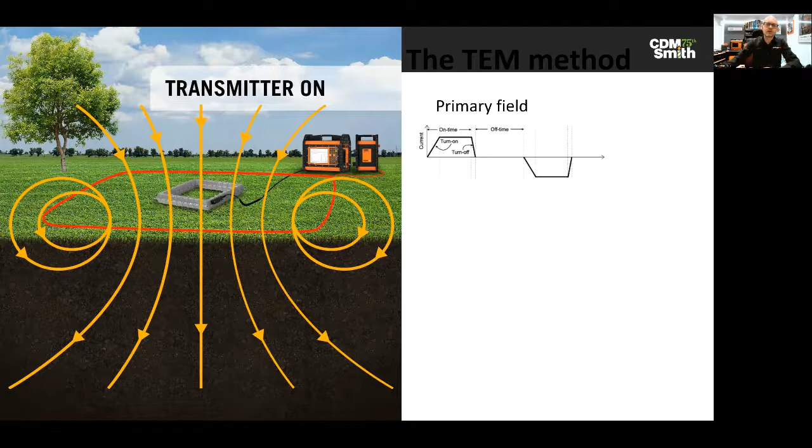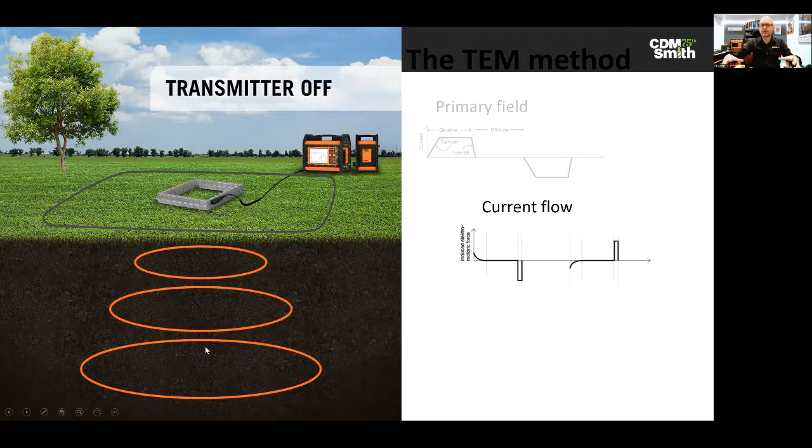What we then do is we switch that current off very, very quickly, and it forces that magnetic field to collapse. And because we can't just remove energy from a system, it has to go somewhere. So that collapsing magnetic field generates electrical currents in the ground, and we call these eddy currents, and they flow directly beneath the transmitter loop and then spread out into the ground, getting deeper and wider as they go. So quite often these are called smoke rings because of the way that they are propagated out through the ground.

Those eddy currents in the ground are acting like a current flowing in a loop of wire, and so they are generating their own magnetic field, and our receiver coil back at the surface is then measuring that field, measuring the eddy currents via their field, and we call that the secondary field. So the primary field is coming from the transmitter loop, the secondary field is coming from these eddy currents in the ground, and the way that those eddy currents decay over time tells us something about the resistivity or conductivity as we get deeper.

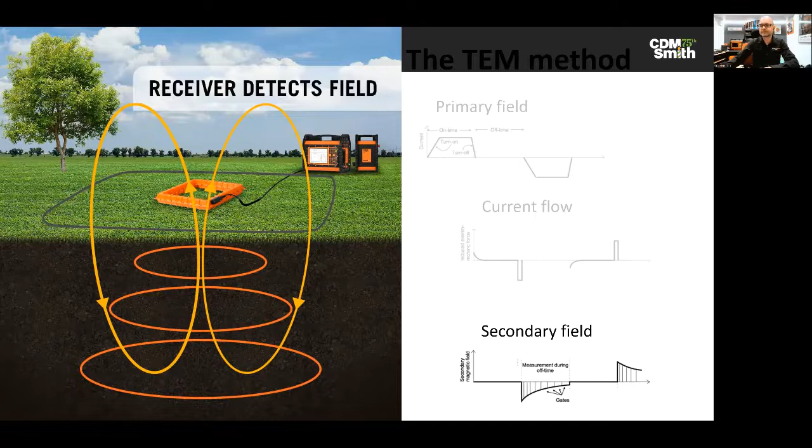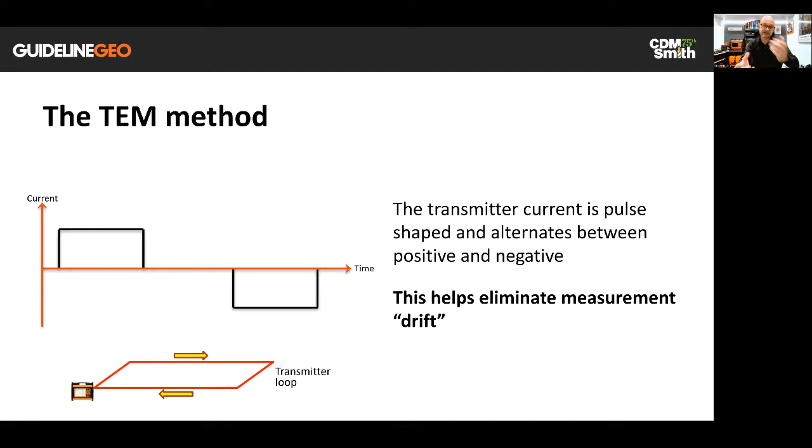It's not quite as simple as just firing a current around the loop and then being done with it. We actually pulse the current very quickly around the loop, and we pulse it in an alternating pattern. So the current is pulsed forwards and then backwards, forwards and then backwards. And by doing that, we help to eliminate any drift in the measurement. We are not charging the ground up in one particular polarity or another. We are hopefully, by the time we finish our measurement, leaving the ground in a very similar state to how it was when we started.

Unfortunately, it's not quite as simple as that initial drawing made out, with a nice square-shaped pulse of current switching instantaneously on and instantaneously off. We actually have a ramp of current building up in the loop, and then a ramp as the current is removed from the loop. And this is quite an important concept, because the faster we can remove the current from the loop, the bigger pulse we can generate, and also the quicker we can start measuring our response from the ground. And I'll come back to that in a moment.

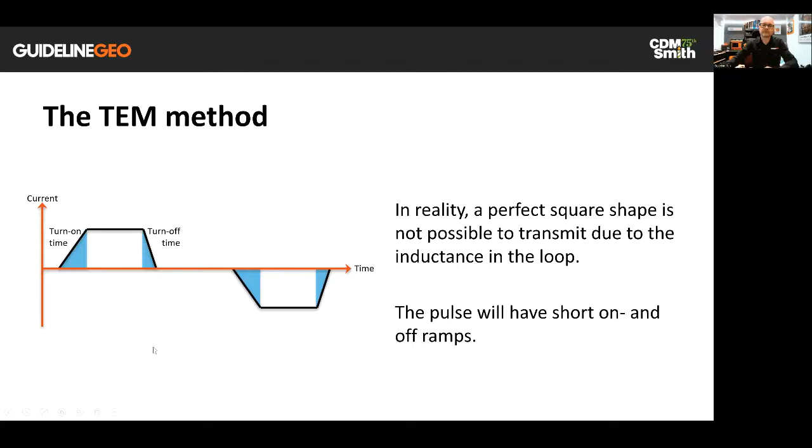But basically, whilst the current is being switched off, that's when we generate the eddy currents. That's when the magnetic field is collapsing and these eddy currents are starting. And we call that an EMF, electromotive force. And it's a pulse of energy generated by that current switching off.

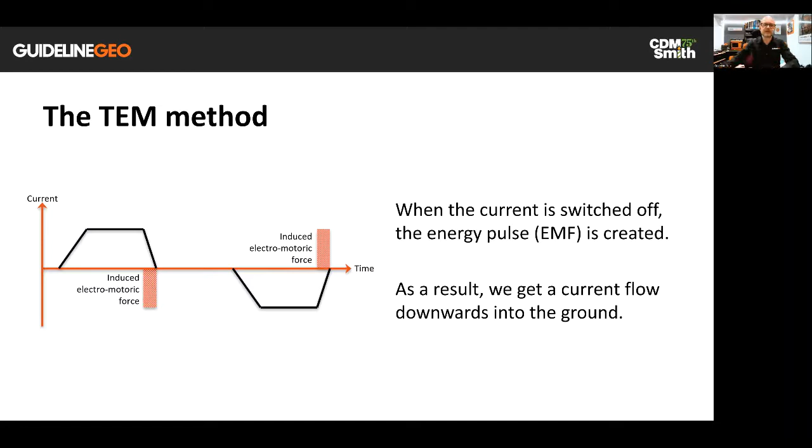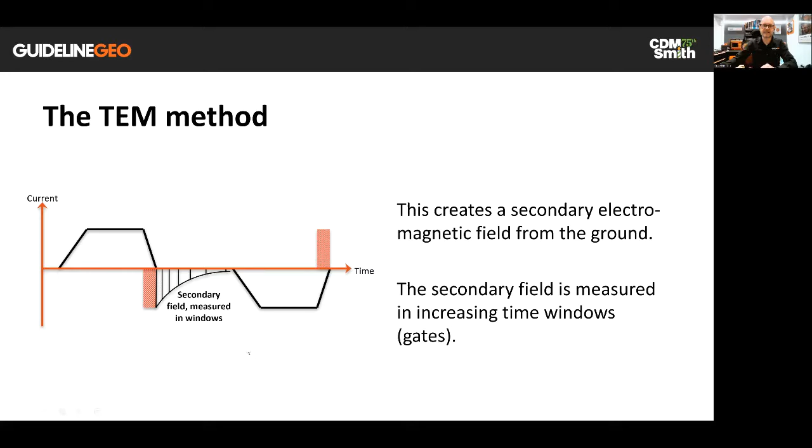Once the current is off, then we need to pause for a moment to actually listen, in effect, to what is happening to those eddy currents moving through the ground. So as those eddy currents spread out and get deeper, and that magnetic field gradually decays, we're going to record that through the receiver loop during an off period. And then once that's done, we do our repeated current pulse in the opposite direction, and then take another measurement. And then we repeat and repeat, stacking many, many times to improve the signal to noise ratios.

So I said that being able to switch the current off quickly was important because it generates a big pulse, but also because that defines how quickly we can begin to measure the effect of the eddy currents. So obviously those eddy currents are moving down through the earth, and we want to start measuring as soon as possible so that we can get information about the very shallow layers as best we can.

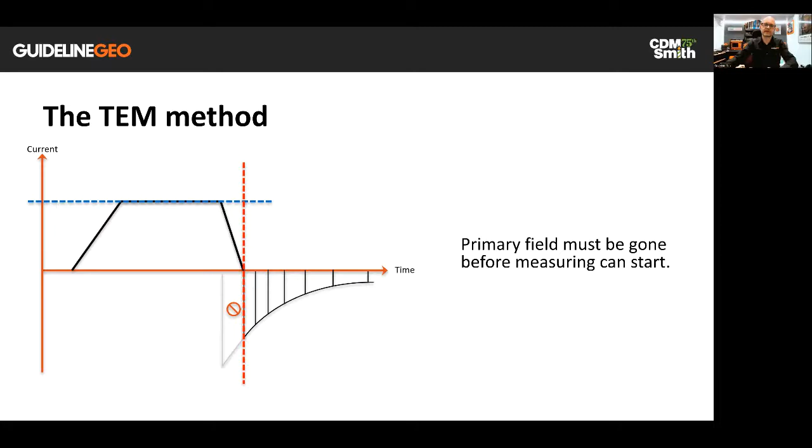But the problem is that if we have any current in our transmitter loop, so here's our pulse coming on in the transmitter loop, stabilizing and then being switched off, any current that is in that loop will still be generating a magnetic field that is far greater in magnitude than the field that is coming from the ground beneath the loop. So that means that we have to wait until all of that current has disappeared before we can begin our measurement of that secondary field. So the longer this takes, the further that eddy current or that transient has moved through the ground before we can start to record it.

Once we've recorded how this field changes over time, we can actually convert that to an apparent resistivity or apparent conductivity from surface to depth. And we call it apparent because obviously if we're measuring from the surface, we don't know what different layers there are and how those layers are affecting the measurement that we've made. So we get a curve of apparent resistivity. We then put that into inversion software, and the inversion software will try and produce a model of resistivities that would create the same data that we have collected in the field.

And then once we have that model of resistivity, so here you have depth down the side, resistivity across the bottom, and you can see how it varies with the different layers, then we can start to make our interpretation. And that'll either be an absolute interpretation where we look at the values that have been returned and look at published tables of resistivity for different materials and say, well, this seems to be this material, or as is more common, we look to do a relative interpretation whereby we say this appears to be the background value, and here we have a change, and I suspect that that change might be because of the presence of, for example, water or some kind of mineral body.

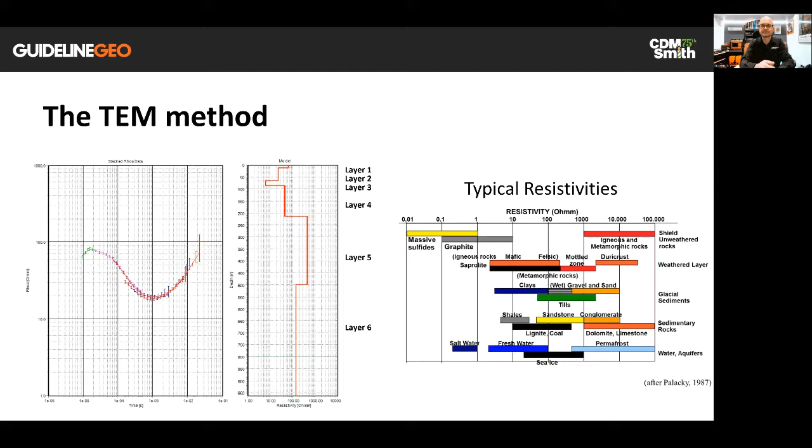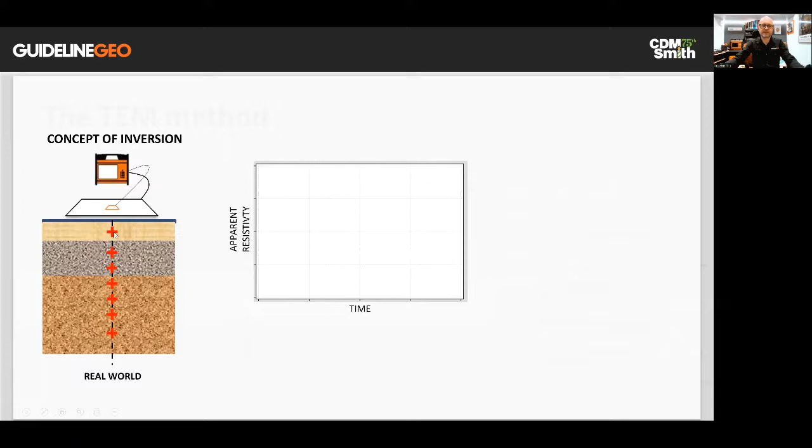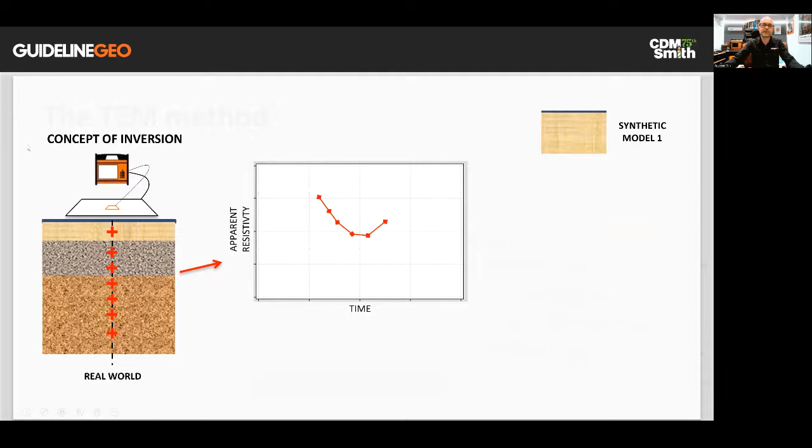Just for those who may be new to the methods entirely and not really that familiar with inversion, inversion is this process of going from our raw data to a model of the subsurface. So what we do is we take our data that we've measured in the field, so that's a series of data points gradually getting deeper into the ground, and we give that to the inversion software. So this is our apparent resistivity curve. We tell it how we've taken the measurement in the field. That's embedded in the header of the data file. And so the inversion software generates a model of what it thinks the ground might look like, and then repeats our survey over the top of that model.

It then looks at how the curve would come back, the raw data would look if the ground had been like this. And if it doesn't match, which it never does on the first time, it'll then change the model and try again. And it'll keep changing the model until it gets to a point where it's either run out of attempts, it can't make any more models, it says, right, that's enough, I'm not getting anywhere here, or when the raw data that we've given it and the modeled data that it has created match very closely, and then it will say, right, here is a model, and this is what I think the ground looks like.

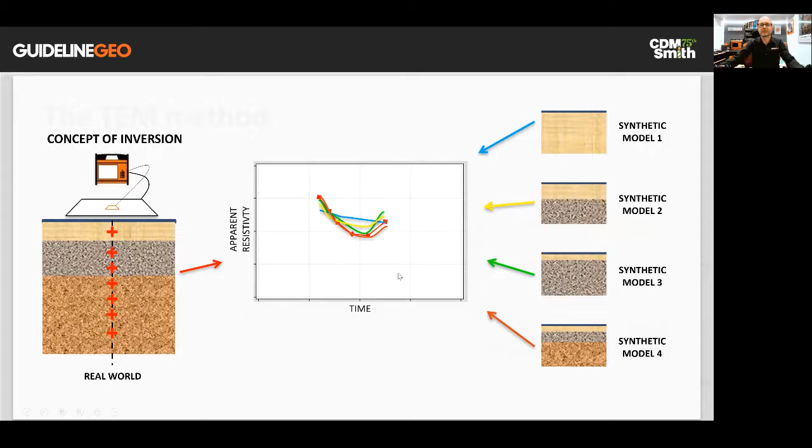At that point, it'll also present us with what we call a residual, and that is just a statistical description of how close the modeled data is to the raw data. So if you have a low residual, it means that the two apparent resistivity curves sit directly on top of each other very nicely. And if you have a large residual, it means that there is a big variation between the two. So theoretically, lower is better, but there is a big caveat on that, and that is that it has to be a realistic model.

So when we get these models returned to us, we need to say, is this what we would expect over this particular geology or this kind of target? Are these realistic resistivity values that I have had returned to me? So there are lots of different models that could produce a very similar looking apparent resistivity curve, and the inversion software doesn't necessarily know what would be realistic for the site that you are working on. So it does take some experience and some analysis to ensure that the model you've been presented with is reliable.

We can improve the models by putting in prior information. So if we have information about the depth to particular geological interfaces, we can help the inversion software by giving it that information. Or if other geophysical methods have provided us with information, we can add that into the inversion as well to try and improve the final result.

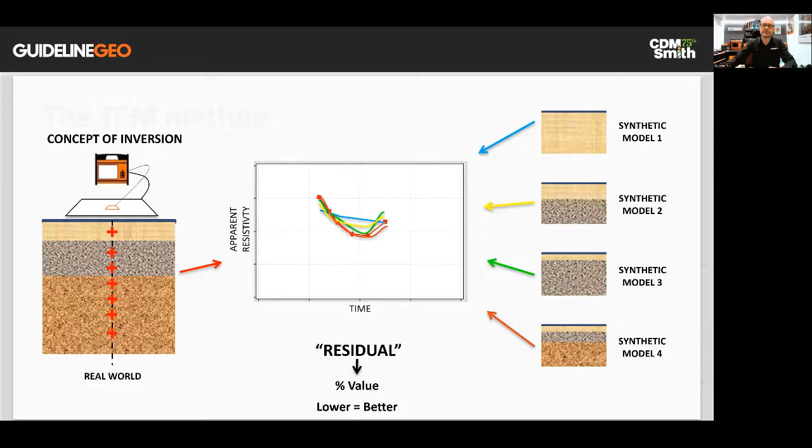This is now starting to appear in some of the inversion packages: the option to extract IP effects from your TEM data. So IP is induced polarization, and this is where we look at how the ground charges up and discharges at the point where the current is switching on and off. So when we switch the current off, the voltage in the ground does not just disappear very rapidly, it will drop off at a certain decay.

And that's to do with the composition of the minerals that are in the ground and chemicals that are within the ground, and also the structure of the ground, sort of how interconnected pore spaces are, for example, that would allow the current flow to be easier. So chargeability can give us a sort of extra tool for our interpretation, by showing a response for certain minerals that have a high IP effect associated with them, like sulfide ore bodies, or it could be clay.

And these kind of differences allow us sometimes to differentiate between materials that otherwise have very similar resistivities. So a very common example is the big overlap in resistivity values for fresh water and clay. They actually have quite different chargeability values associated with them. So it can aid your interpretation to understand the chargeability as well as the resistivity model. So that's the kind of theory about how we're generating and recording signals.

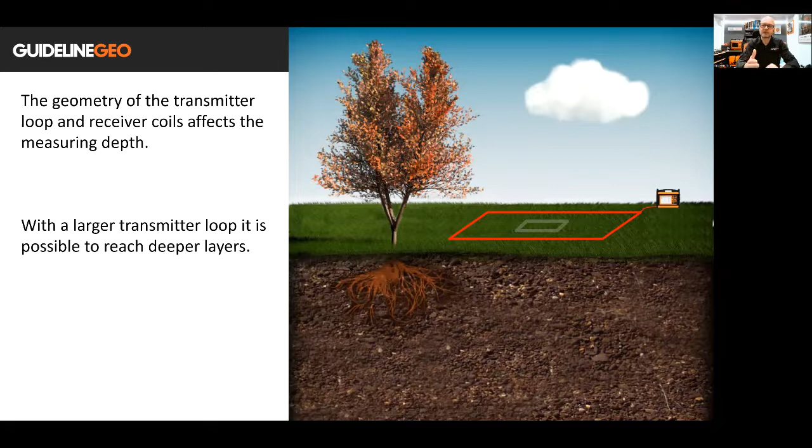When it comes to the receiver coil, the size is defining how quickly we can respond to the changes in that secondary field. So if we use a very small loop, it can respond very, very quickly and therefore can map the eddy currents that move very fast near surface very easily. The problem with a very small receiver coil is that once those eddy currents get deeper and the secondary field is much weaker, that small coil isn't scooping up as much of the secondary field and therefore struggles to record it when it's much deeper.

So if we use a larger receiver loop, then we can record the weaker, slower moving responses from depth much more reliably, but we do so at the cost of the near surface detail. So let's have a look at how that transient moves through the ground. And what we're looking at here is, again, a very simple schematic of the ground surface with our transmitter loop and a single receiver coil at the center.

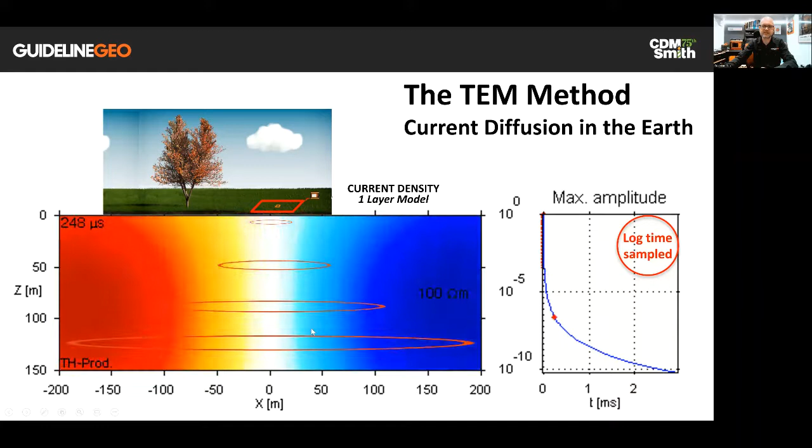So if I plot this now with equal time for each slide, so this is what it would be more like in reality, then you see that those shallow responses are incredibly fast and the deeper responses are much slower. And this is what makes TEM quite a difficult method to design hardware for, because we have to design a system that can record large and very fast changing signals very early on, but also record very small and very slow changing signals later in the decay.

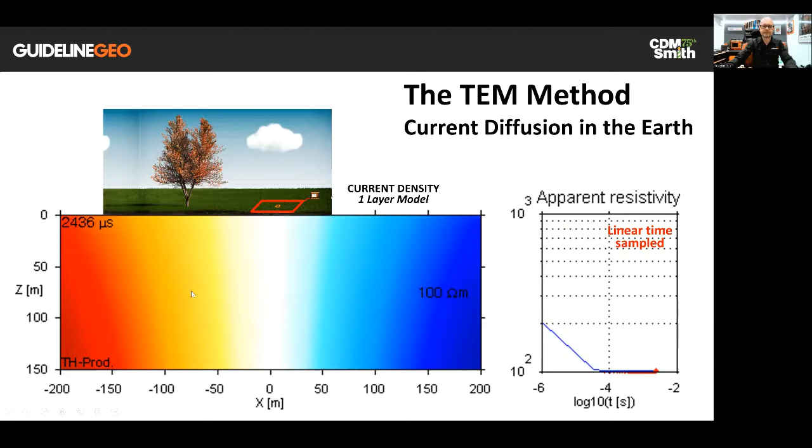And we're still only talking about a couple of thousand microseconds. So obviously this is happening in a fraction of a second. So it's a very difficult thing to design electronics to be able to do this reliably. So there we were looking at a 100 ohm meter model. We're going to go back now to using the log plot of the time, just because it's a bit easier to see what's happening with the transient if we do that.

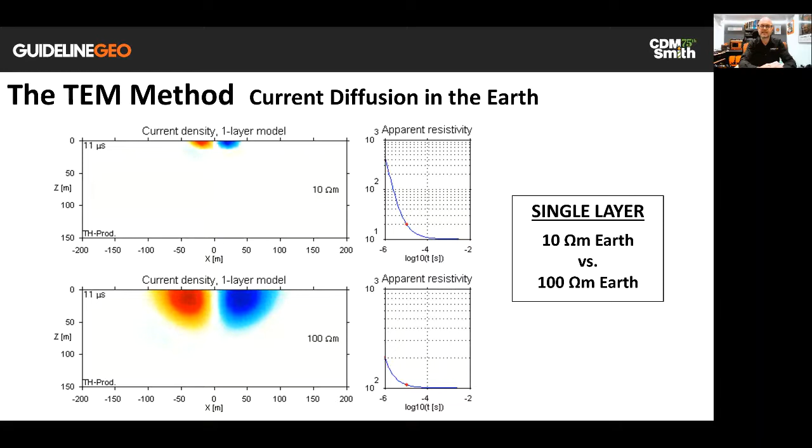So again, this is reaffirming the fact that this method is well suited to identifying these conductive bodies, because if you imagine that this was some mineral ore or an aquifer within a resistive bedrock, then clearly we're going to be able to identify that very well. Whereas if we were trying to map a resistive layer beneath a conductive overburden, it would be very difficult for us to absolutely identify what the resistivity of this bottom layer is.

So you'll find when you do inversions with TEM, if you come to a resistive basement, the contact depth between the more conductive overburden and that resistive basement should be defined pretty closely. It should work quite well. But the absolute resistivity of that basement will be difficult to determine, and it will generally have a low reliability associated with it. And the reason for that is that once a layer goes maybe above 200 ohm meters, something like that, it could quite easily be 2000 ohm meters, and TEM would not differentiate between the two of those when you run an inversion. All TEM knows is this is resistive.

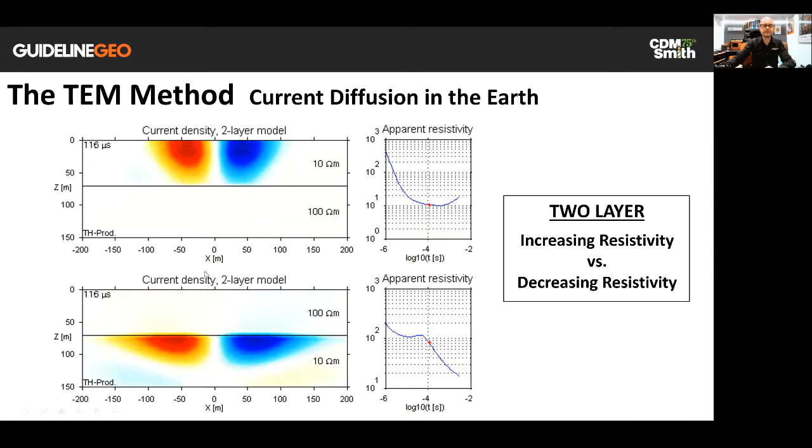It can't identify how resistive it is. So again, reaffirming that this is a method for identifying conductive bodies rather than the absolute resistivity of resistive targets. That can cause us a problem if we have a resistive layer trapped between more conductive layers.

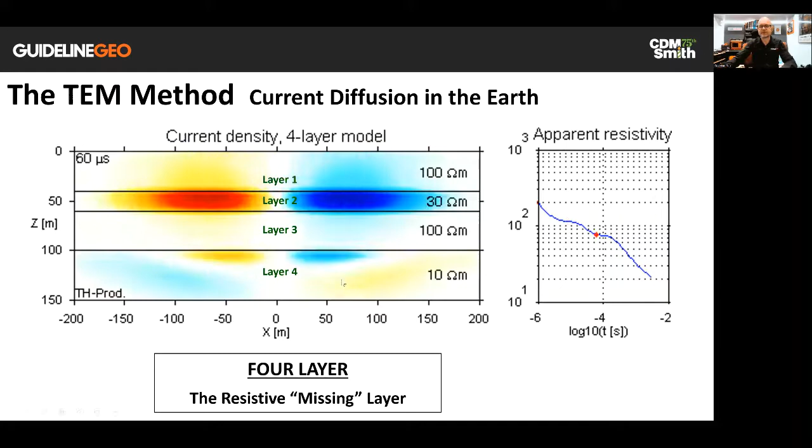So that's the question then. Well, what else should I consider when I'm deciding whether or not I want to use TEM for my measurements? Well, I would say that 4 questions are all you need to ask to understand whether or not TEM will be suitable. So the first one is, what is the application that you're going for? What is it that you want to map? And so good answers will be, as I say, anything that's conductive. So groundwater, saline intrusion, salination of groundwater, areas of mineralization, or looking for other bodies that have particularly high conductivity associated with them, such as clay layers.

So less ideal would be, hey, I've got a resistive layer of stone that I want to extract and I want to know where that is. Well, then that wouldn't be an ideal target for TEM, and you would probably be better off looking at something like VES or ERT. Target depths. Well, TEM can actually penetrate very deeply. The only thing really that is limiting you is the size of the loop and the amount of current that you can put around it.

So for our WalkTEM system, we would say that anything under 600 meters is relatively easy for us to achieve. Once you get over 1,000 meters, that is probably pushing the limit of what we would be able to map. ABEM traditionally are near surface geophysical instruments, and I think that once you get beyond 1,000 meters, we can probably ditch the near surface titles. So yeah, that's the kind of range that we're working in.

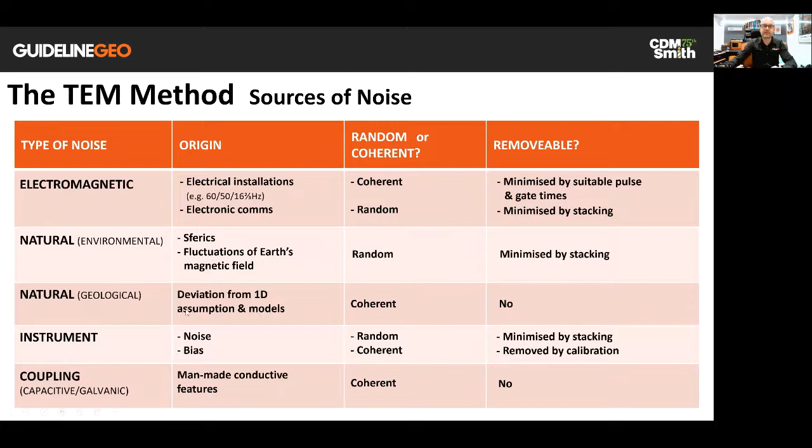The galvanic coupling is more difficult to see because this is when you have some conductive body, it has a good earth on it. And so you just generate an eddy current in it and the eddy current slowly decays, because that then replicates in a very similar way a conductive body beneath the ground.

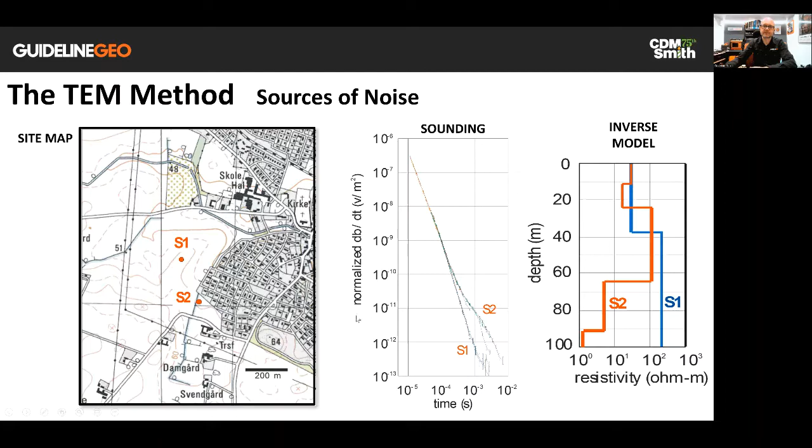Okay, so that's all the theory. Let's now have a quick look at some example data sets, and then we'll move on to the WalkTEM 2 itself, the instrument, and then we'll finish off with some questions at the end, if there are any.

So this first one, a very small data set, very simple. In a lot of Scandinavia, they have problems with a material called quick clay. So this is clay that has a very high salt content. It's a marine clay, and you find it in layers in the geology.

And when that clay has its salt still in place, the salt adds structure to the clay, makes it nice and firm and stable. But what happens over time is that gradually the salt is washed out of the clay, leached out of the clay, and when that salt disappears, the structure of the clay disappears and it produces a slip plane.

And so there was one in the news, a couple of years ago now, given the compression of COVID timescales, in Norway, where an entire hillside basically slipped away, and that was due to this quick clay. So it doesn't take very much to actually start the ground moving. So quite often it's associated with construction work, and a bit of vibration in the ground causes this clay to liquefy, and everything that's above it then just moves.

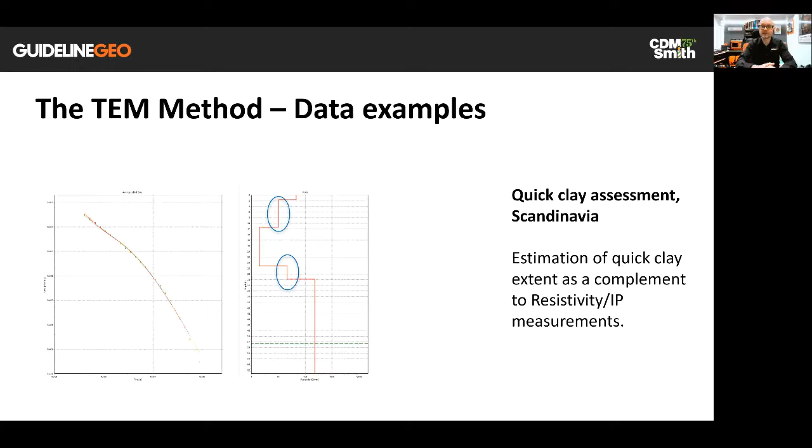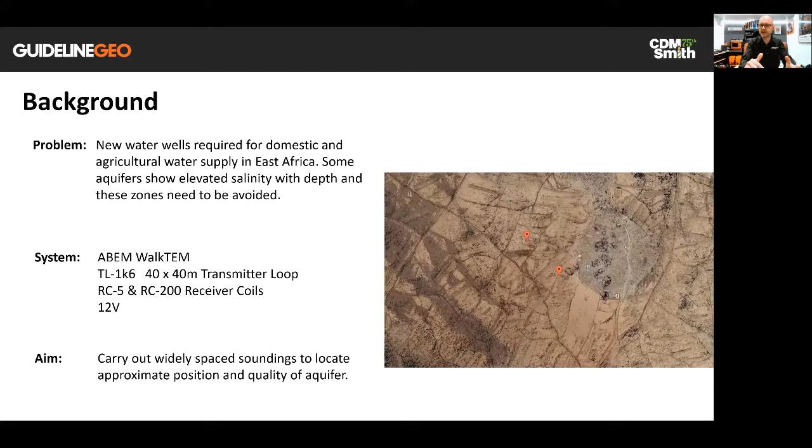And they took, I can't remember how many, hundreds of soundings across a very large area of this particular region of East Africa. They were using the WalkTEM with a 40 by 40 meter transmitter loop and 2 receiver coils at the same time, one tuned to the shallow, fast changing transient, and one slightly larger, which is better at receiving the transient secondary field when it's much deeper and slower moving.

And so these are just some examples of the models that they generated, and they have a very good understanding of the range of resistivity values that indicate fresh water in that particular geological setting. So they know the host rock plus water makes for resistivities within a fairly narrow range of values. And so they simply would undertake their soundings, highlight the region on the model where the resistivity is within that range, and use that as the indicator of the presence of an aquifer.

With this one, they were also able to identify in some locations where the aquifer becomes saline at depth due to mineralization, or perhaps recharge from the coastal region being drawn in rather than it being recharged from surface water. So again, this is where the resistivity drops to an incredibly low value, around 1 ohm meter, which just indicates that there must be saline water within the geology.

We use this site a lot as a case study because it was kind of ideal conditions: very homogeneous, slightly resistive overburden, which then gives way to a large conductive body, i.e. the aquifer. So the transient moves very rapidly through the resistive overburden, gets into the conductive bit below, and sits there for a while. So that meant that with that 40 by 40 meter loop, they probably hit what would be considered the maximum achievable.

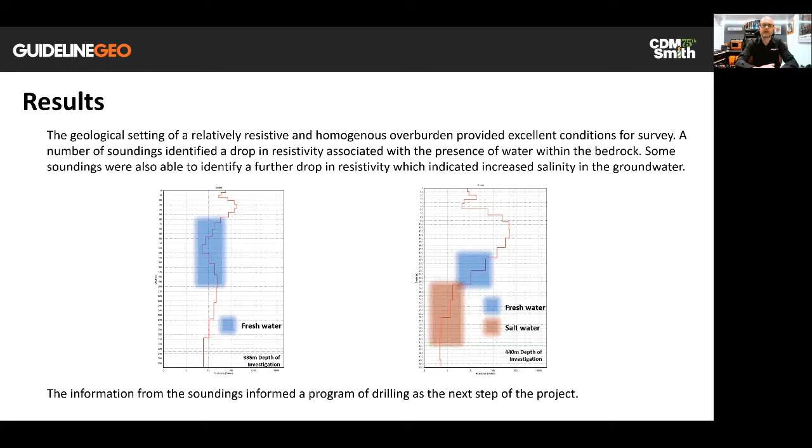And they were using primarily the WalkTEM with an external high power transmitter, 60 amp transmitter, with a 100 by 100 meter transmitter loop, so square with sides of 100 meters, enclosing 1 hectare of land. And then they actually used 2 receiver coils at the center again to be able to map both the shallow fast changing transient and the deeper slower moving one. And they were using 96 volts to drive 60 amps around that loop. So they had, what would that be, 8 12 volt car batteries there to power the system.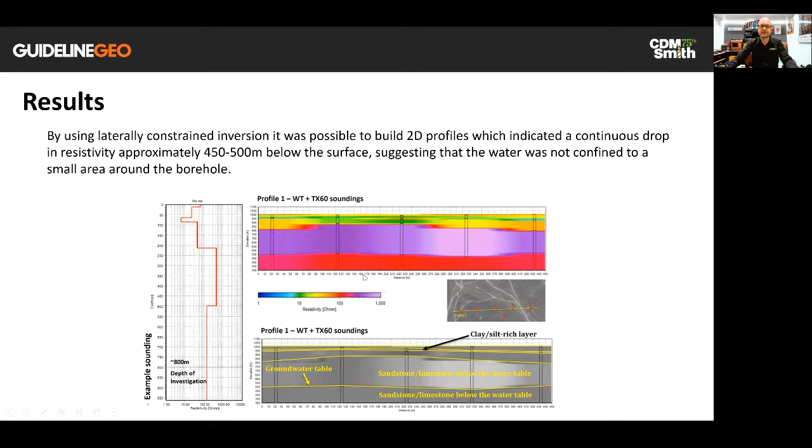And then this next one is actually one that is used as an example data set with the Aarhus Workbench software, which is the processing software that we generally recommend. We use Aarhus SPIA TEM for doing the 1D inversions, and then Workbench for doing further visualization. And so in this particular example, it's looking for river channels. So this is actually in Denmark, where the groundwater is all stored in paleo channels, old river channels that are full of sand and gravel. So that acts as a natural sump, a natural reservoir for the water, because in Denmark, pretty much all of the geology is clay, and so it doesn't really hold water in any great volume. So that's what they're trying to map.

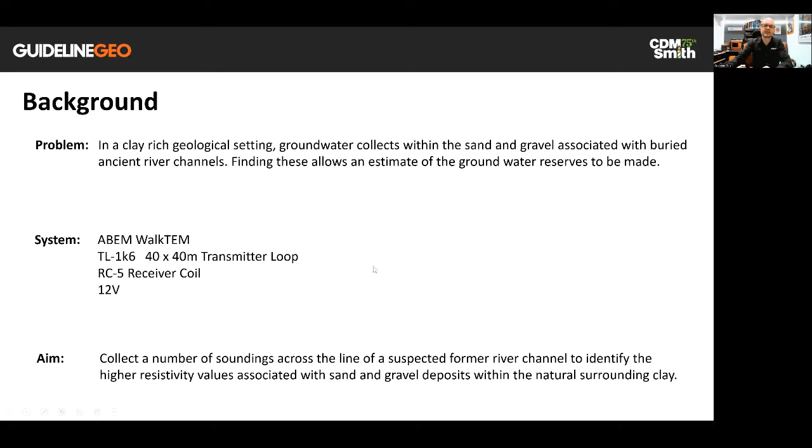So this is an example data set. If you want to have a play around with SPIA TEM and Workbench, you can actually ask for a trial license. You can download this data set and you can work with it. And what we see here are the black dots of the individual soundings. There are 16 soundings in total along a transect, which is 1.5 kilometers long. So the soundings were taken down one line, down to the bottom, it's hidden behind this image, turn around, come back up again. And that was easily done in a day with a team of sort of 2.5. And I know that because I collected the data. So there were two of us with the 40 by 40 meter loop and the small receiver coil at the center.

And then we had a third partner who was driving a vehicle, dropped us off here, drove round to meet us here. And then we went across these fields and they dropped us, came and met us at the far end again. So very easy to achieve that amount in a single day. We weren't really pushing ourselves at all. Again, just because of the ease of layout and the speed of data collection.

And then once you've done that, then you can actually start to generate either 2D profiles like we looked at before, where we see the conductive clay in blue and the sands and gravels that contain the water being a bit more resistive with the reds and the purples.

Or we can actually slice through the data from the surface down to give us maps of resistivity at different depths. And so there we can see the river channel coming through the middle here. And if we could see the bottom end, you'd see that it was back to blue in the clay over this side. So very easy to map the shape of the channel and therefore work out the volume of material that would be held within it.

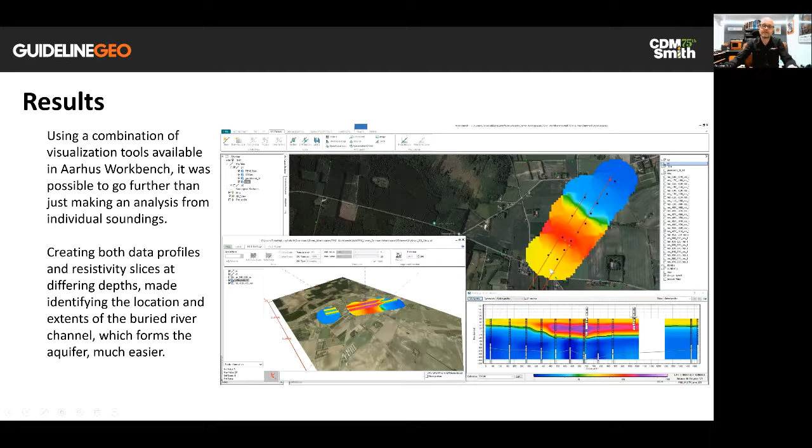Okay, so for the final bit of the actual presentation, I'm going to look at the WalkTEM 2, the current offering that we have for a transient electromagnetic system at ABEM. The WalkTEM 2 was launched in, I think it was February last year. So it's been out about a year and a bit now, and it's quite a step up from the WalkTEM 1 in terms of it's a slightly different design.

So our WalkTEM 1 was transmitter and receiver electronics all in a single box. With the WalkTEM 2, we've separated out the transmitter into a separate box because we wanted to put a bit more current into the transmitter, allow it to be a little bit more powerful. And we didn't really think it was realistic to be able to record good, clean data with that more powerful transmitter sat right next to the receiver circuits. So we've separated them out now.

We've also increased the number of models so that hopefully people find it an easier fit. With the WalkTEM 1, there was only really one model, and then the only way you could really change the design of the instrument was to change the loop sizes or add a high power external transmitter. So now we've got a few more options for people to consider.

Main components of the system, as I say, we've got the receiver unit that's recording the secondary field from the eddy currents with a maximum of 2 channels. So we can either have 2 different size loops, or we can have 2 loops the same size in different orientations if we want to measure different components of that secondary field. We then have a choice of external transmitters that can then power our choice of transmitter loops.

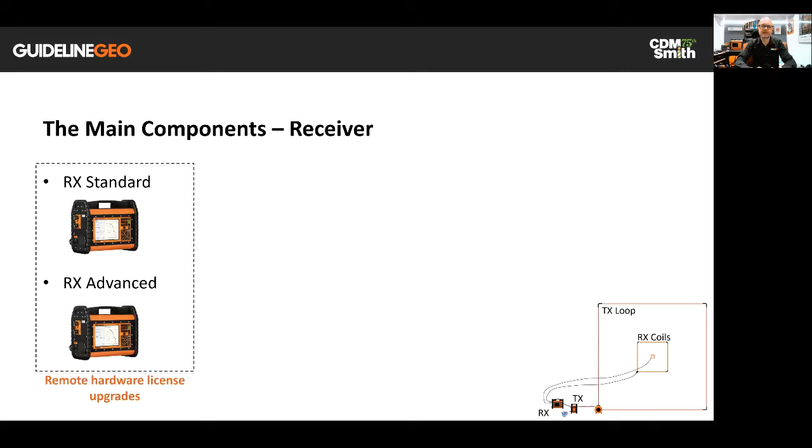The specification is controlled by a hardware license, which means that if you were to purchase a standard and later decided that you wanted some of the more advanced features, you can pay for the upgrade and then immediately have the benefit by just connecting online and having the license upgraded. So there's no need to send the instrument back to Sweden.

Our advanced is, as I say, a 2-channel instrument with a choice of 2 receiver coils, a choice of 3 transmitters, a very wide range of transmitter loop sizes. We have onboard inversion. So we have processing software built in. This SPIA TEM is built into the software so that you can actually do an inversion on the machine as soon as you finish the data collection while still in the field.

We have the ability to do waveform analysis, and I'll talk about that later. We have a dual moment operation, which again, I'll talk about in a few minutes, which is where we can pulse both high and low current signals through the transmitter loop. We have internal damping resistors, which I'll talk about again in a moment, to tune the transmitter loop to give us hopefully a perfect transmitted signal. And we have hot swappable batteries, so just slide in, slide out lithium-ion batteries.

So that's the advanced. If you buy the standard, the difference is that you only have 1 measurement channel, so you can only use 1 receiver loop, and you can only use what's called an RC5.

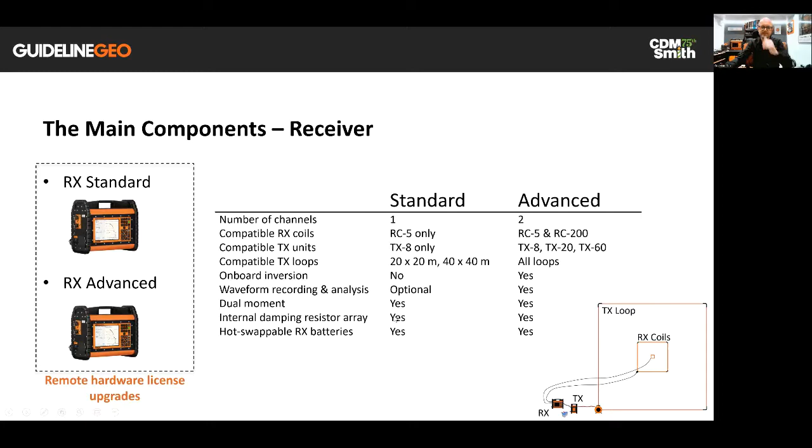That's the smaller of our receiver loops. So we have 2 different sizes. It only works with the smallest of the transmitters as well, and it'll only work with the 2 smallest loops. There's no onboard inversion. You can look at your raw data, but you can't create a model from it. You have to take the data off onto an external PC and then process it. The waveform analysis is an option on the standard, but the rest, the dual moment, the internal damping resistors, they are the same.

So as I mentioned, the receiver coils there, there are 2 different sizes. There's a small RC5, which is about 1/2 meter across. It's got 20 turns of wire in it, and it's the equivalent of a 5 meter square loop. So that's the one that is very good for the shallow responses and the one that we would use with the smaller transmitter loops. And then the RC200 is a flexible 2-turn 10 meter square that we would prefer to use for deeper measurements. So it's not compatible with the smallest transmitter. It wouldn't really fit inside it very well. But as I say, on the larger loops, we can actually use both together.

In terms of transmitters, we have 3 options: TX8, TX20, TX60. So 8 and 20, the 8 just means that the maximum output is 8 amps, 20 amps. So this is limited for the shallower applications, and obviously is an entry level kind of cost for that one. Like the receiver, this transmitter unit has the same hardware in it, regardless of which you buy. And the specification is again controlled by a hardware license. So you are able to upgrade later, again, without having to send the device back to Sweden. We can do that upgrade remotely for you.

If you need to go above 20 amps, well, then we have a separate, much larger transmitter, the TX60. So this has the ability to output 60 amps. And the only downside of that is that the larger transmitter doesn't have a dual moment operation. So dual moment means that it can alternate between putting out a small current and a high current. The TX60 will just put out the maximum it can for the voltage that has been applied to it.

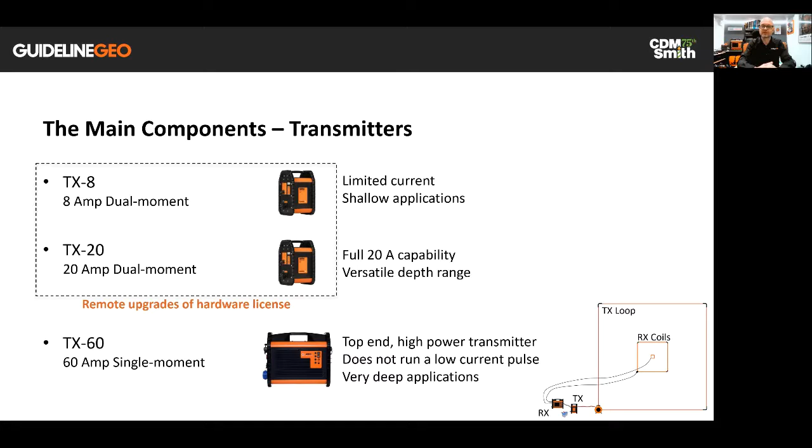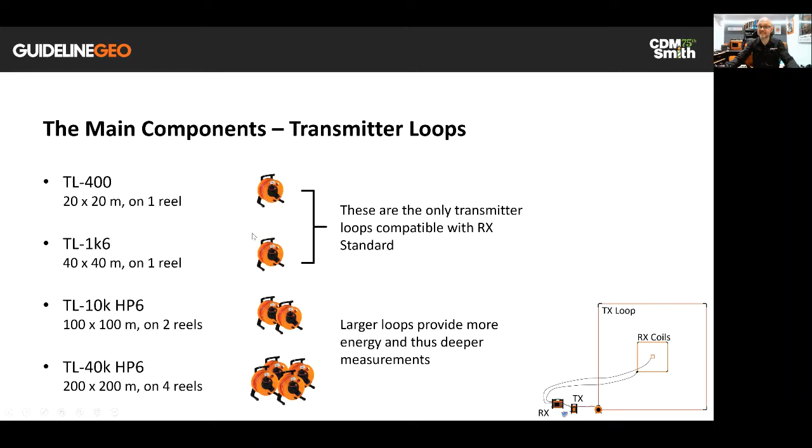So if you go from a standard with a TX8 to an advanced, you've still got the same high and low current capability, but you now have the additional channel. You can use all of the transmitter loops. You can use both of the receiver coils. You have the waveform analysis that we'll talk about in a moment. And you also get the onboard inversion. Then if you go from the advanced TX8 to advanced TX20, it's the same instrument. All you're doing is enabling yourself to have more power, generate a stronger eddy current, and hopefully see deeper. And then again, with the TX60, you are again increasing the maximum amount of power that you can output.

So if you have a look at a couple of configurations, we have the RX standard with the TX8, so the basic receiver, the smallest transmitter, the smallest loop, the single receiver at the center, and that's kind of the entry-level model. That's the smallest system that you could buy. Depth capability probably around about 100 meters with that particular system. So excellent for any shallow application.

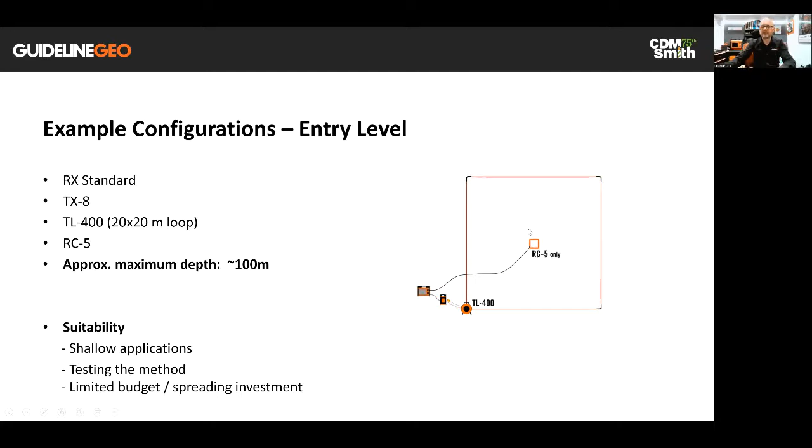The largest configuration that we could make would be the advanced with the TX60, the 200 by 200 meter transmitter loop, and the RC200 at the center. No point using the RC5 with this setup because the RC5 is tuned for the shallow responses. You just can't switch off 60 amps running around a 200 meter loop fast enough for the RC5 to actually be useful. So you just use the larger receiver loop.

With this one, I've said maximum achievable depth should be 800 plus meters. I've said that because we know from that Middle East example that the 100 by 100 with the TX60 was achieving DOIs of 800 meters thereabouts. So this should certainly be able to achieve that, and potentially down to 1,000 meters. So this is for those projects where you have a big depth requirement and you just don't need to know what's happening near the surface.

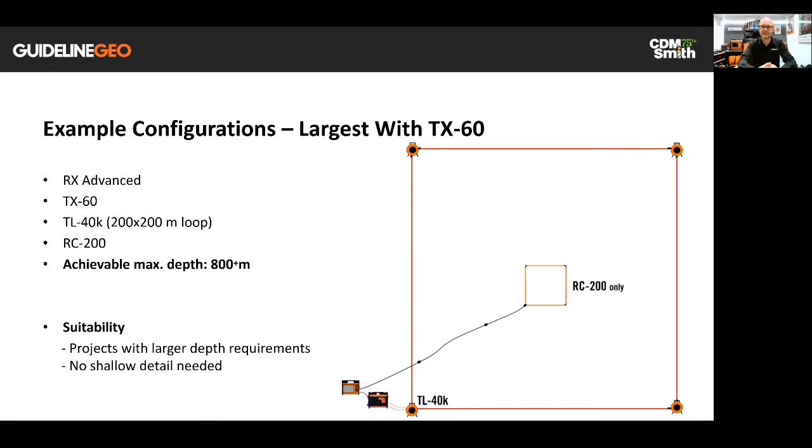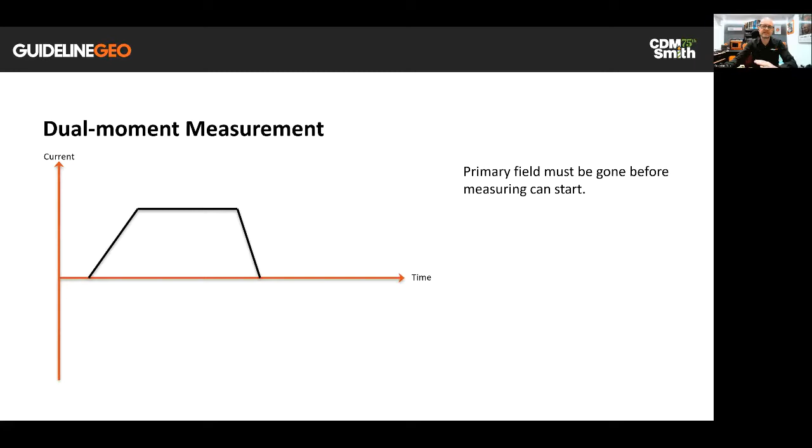So just to cover off a couple of the things that I mentioned on the functionality of the instrumentation. One was the dual moment measurement. So what we said was that when we're taking a measurement, we can't begin recording the secondary field until all of the current has gone from our transmitter loop. So a high current transmission, high moment, high pulse will give us the deepest response, but it will give us the longest switch off time. And so therefore we lose some near surface information.

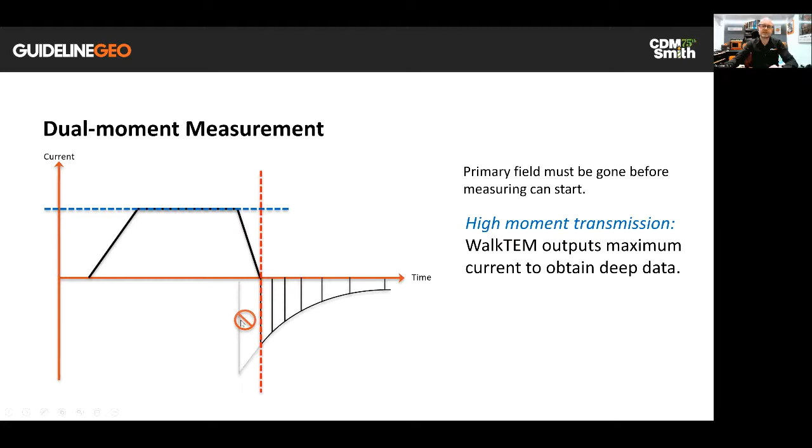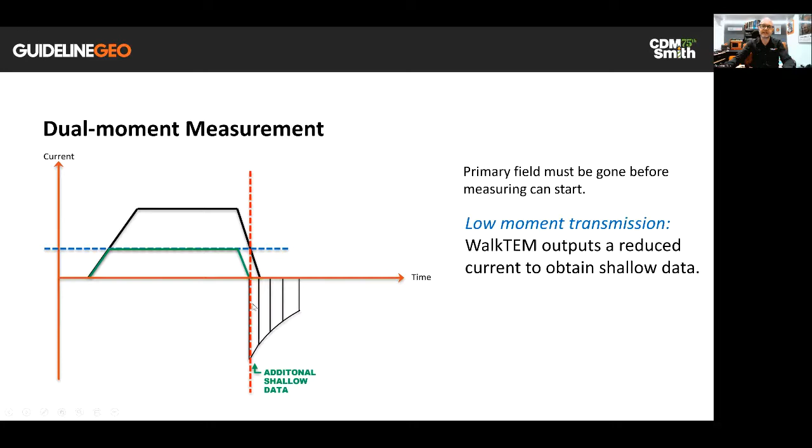If we can then have a low moment, a low current pulse, well, then it's quicker to switch off and we achieve more information near surface. And even though that's quite a short time, it looks quite a small gap, we know that transient is moving very quickly, and therefore there's actually quite a lot of information encompassed in that short time. So what the WalkTEM can do is it can alternate automatically within a single measurement cycle between the high and low moment, and then combine both data sets to produce a seamless decay curve.

And what it will do is pulse forwards, backwards, low moment, forwards, backwards, high moment, forwards, backwards, low moment, basically giving us hundreds or thousands of individual stacks, individual current pulses to record from. And that's not all we have. We have the low and the high moment. We would also potentially then have the decay curve from both the small and large receivers. So we have 4 data streams: low moment and high moment, small receiver, low moment and high moment, large receiver. And all of that is presented in a single data file that we can then filter and run the inversion on.

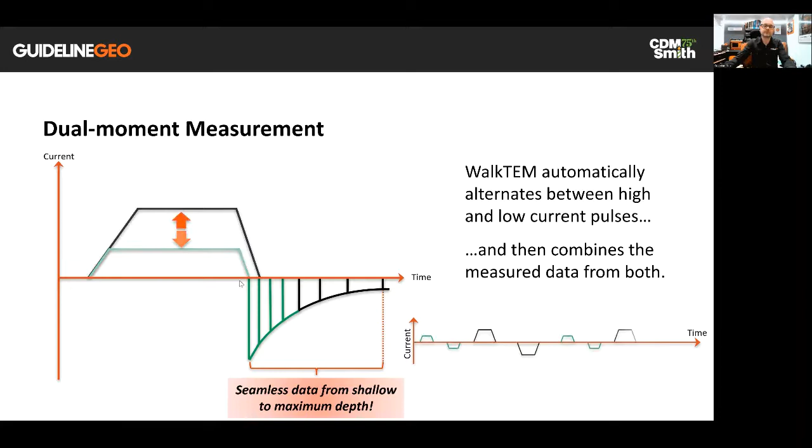And then we have the waveform analysis. So waveform analysis is looking at what happens when we switch that current off in the transmitter loop. So what we need to discuss briefly is the concept of damping. So we have our current flowing round a loop and we stop it very, very quickly. And when we do that, it generates noise, generates this oscillation of current and voltage around the loop.

The way to think of it is if you imagine a gutter of water that is flowing at a constant rate. If I was to suddenly stop that flow of water in that open pipe, there'd be a big splash. So that's our EMF pulse. But then there would be waves kind of splashing backwards and forwards through the pipe. And that's kind of the problem we have when we try and switch this current off. So what we need to do is we need to be able to damp that. We need to constrain that oscillation backwards and forwards.

And we need to be able to damp it at what we call the sweet spot, where we don't over damp, because if we put too much damping in, we don't generate a nice big pulse. But if we don't put enough damping in, we end up with this oscillation, this noise that then gets carried through the transient into our raw data. So we do this damping by applying damping resistors to the transmitter loop, and the damping resistors are built into the transmitter on the TX8 and the TX20. So we just need to select the correct one.

And for example, on the WalkTEM 1, choosing the correct damping resistor was entirely manual. You had to take a measurement with one of the damping resistors in and look at the raw decay curve and say, yay or nay, do I think this is good or bad? And then if necessary, change the damping resistor and look at it again. And it's a very subtle difference in the decay curve, but that subtle difference in the decay curve can generate a huge difference in the final model.